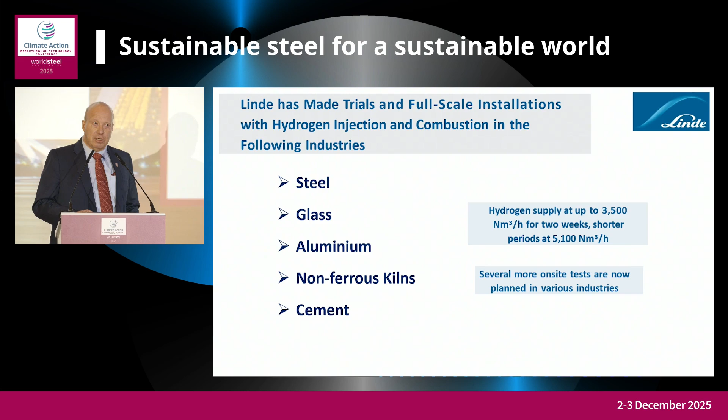It's quite tricky to carry out full-scale tests because you need to bring in the hydrogen there. We've been running up to about 5,000 cubic meters per hour. We've run for 2 weeks with 3,500 and so on. It is difficult, but the results have been great.

Traditionally, it's about reduction - it's about use of hydrogen in a short-term perspective, for example, injecting hydrogen into a blast furnace. And there are a lot of discussions, of course, about using hydrogen to a large extent in DRI production. Today it's about reforming natural gas, so it's not that big a step in a way there.

But what is worth noting is the scale required here when it comes to the hydrogen supply - the huge amounts. If you look at a DRI plant of typical scale, we might need a 1 gigawatt electrolyzer, and those are not off the shelf today, so keep that in mind.

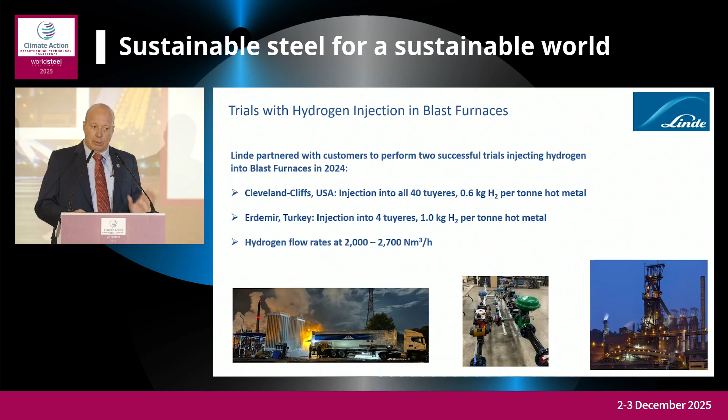However, it worked out fine. We've been involved with trials in blast furnaces. Here are 2 examples: what we've done with Cleveland Cliffs in Chicago and with Erdemir in Turkey. But that has been done on a level equivalent of 1 kilogram of hydrogen per ton hot metal, which is a fraction of what you maybe recall from the previous slide. Works fine, all good - so that was about that part of the reducing gas.

Now let's move into the use as a fuel. That is in the melting operations, that is in the heating operations. We start with reducing the need for energy.

That is the starting point. If we can do that by going from air-fuel combustion typically to oxy-fuel combustion, we can achieve fuel savings of, let's say, 30% or something like that. If we can do that in such a way, so we can also be ready to use hydrogen when there's a viable supply, that is the perfect pathway, I would say.

Oxy-fuel installations across the industries - we as a company have done about 900 of those, the majority in the steel industry. So this is no news for us.

What does it mean? Many people say, oh, this is strange, it will have a lot of implications on the processes. Well, the big step going from air-fuel to oxy-fuel has been taken at many occasions. And of course it has an impact on the furnace atmosphere, for example, where we go up to have the products of combustion that are practically only CO2 and water vapor.

However, what is interesting to note is that use of oxy-fuel combustion is very good for carbon capture, as we reduce the flue gas volume by say 75%, and we increase the CO2 concentration. So looking at the toolbox we have, it can also be combined in that way.

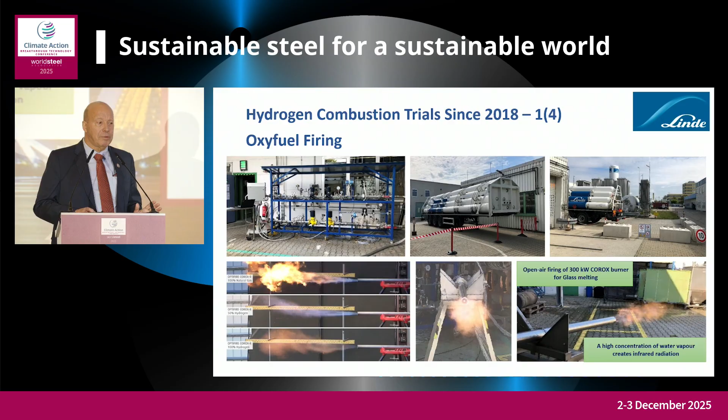Here you can see what happens when you blend hydrogen into the oxy-fuel, moving from 100% natural gas to 100% hydrogen, and see this in the various steps. Simply, this works perfectly fine.

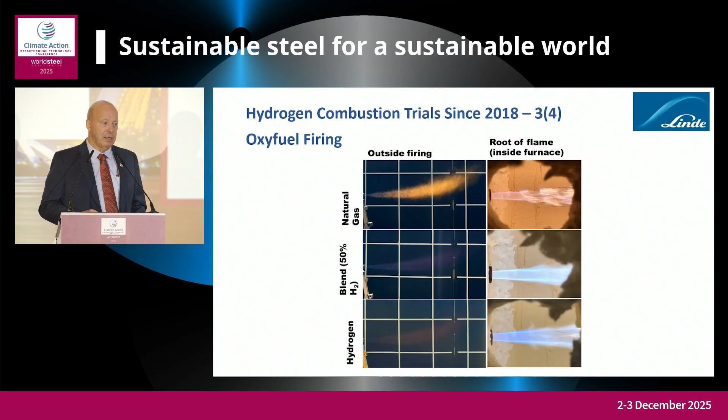So in simple terms, box is ticked. This works. And we can conclude that also from our experience using hydrogen and oxygen in the glass industry, for example. So we can blend in all the way up.

However, what is worth noting is that we should be very careful if we blend in with air-fuel combustion, normal air-fuel combustion, because then we could have a negative trade-off, creating a lot of NOx while saving CO2. That we don't want. So we have been working with this, and I can tell you the good story is that we are not increasing the NOx - we are decreasing NOx, we are decreasing CO2.

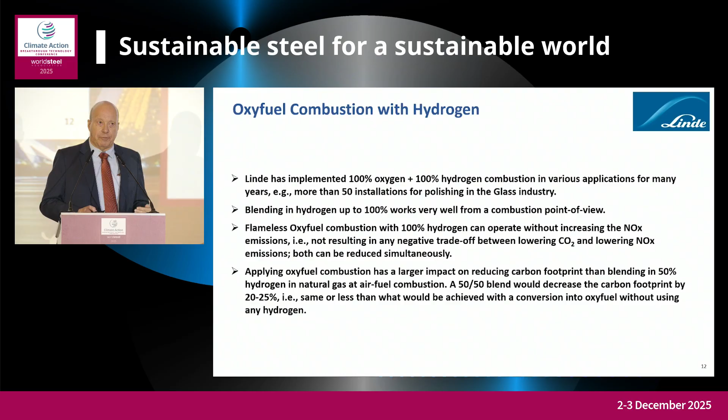It's also worth noting that when blending in, we talk about percent, and that is volume percent. If I blend in 50% hydrogen into the natural gas, I have a 50-50 mixture. The impact on the carbon footprint, providing the hydrogen is 100% zero carbon footprint, 100% green so to speak, is a little bit more than 20%. If I would do only a conversion from air-fuel to oxy-fuel, I would probably save 30%.

One of many technologies is the CoJet technology that we introduced in 1996, which became industry standard in electric arc furnaces. We tested this in full scale. It works perfectly well for the flame envelope of the oxygen injection jet. Not only are we saving on the fuel, but we are also getting a longer oxygen jet - it travels a longer distance, so it's a process improvement.

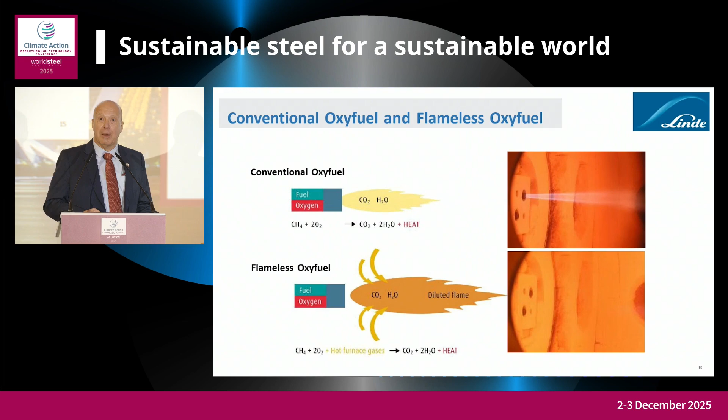That was examples of when we are cutting, when we are melting. When we go into heating, we talk about another type of oxy-fuel combustion - flameless combustion, not conventional. So we create a flame cloud instead of a very sharp flame. This is what we apply when we heat something - that could be a ladle, or it could be a piece of steel.

For ladles, we have tested this out full scale. We also have smaller installations up to 7 tons running with 100% hydrogen as a fuel using flameless combustion. So this works. It's more of a supply issue.

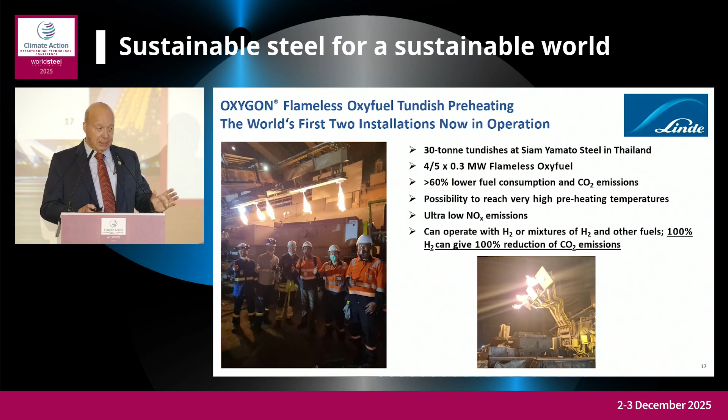Let me give an example from this part of the world where we see something new happening, and that is use of flameless oxy-fuel to heat tundishes. I'm very happy to reference that we see use of new technologies in the ASEAN countries here. This is from our great friends at Siam Yamato Steel in Thailand, where we have the world's first two systems with this. And this is then a possibility to use hydrogen going forward as well.

Now, reheat furnaces. We've been working for a number of decades with converting reheat furnaces into use of oxy-fuel combustion of various kinds. To date, we have done 190 installations across the world. In the past, this was mainly driven by getting more tons out per hour in existing furnaces. Lately, the focus has been on fuel savings. And this year, we've done 4 or 5 furnaces. We just started up 3 furnaces at Taigang TISCO in Taiyuan, and we see more and more of this coming.

So what will happen when we heat a material using hydrogen? Flame was okay, that worked. No increased NOx, actually a reduction. But what will happen if we start heating material, heating steel?

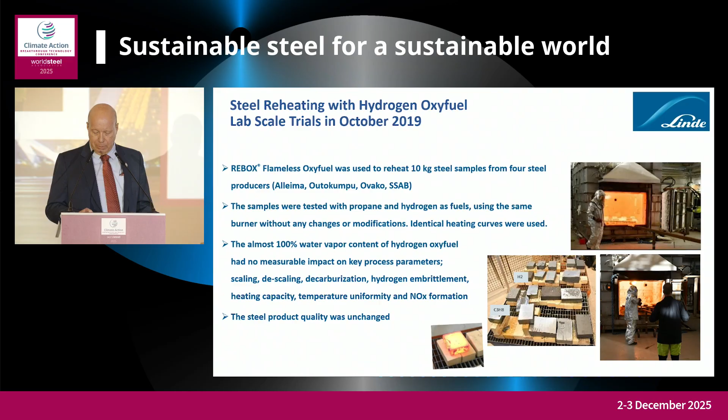It was then decided that after this world first, let's make it a real world first and make it in absolute full scale. So early last year, Ovako started operating this system, 100% hydrogen, 100% oxygen, across all the pit furnaces there.

The hydrogen comes from an alkaline electrolyzer, 20 megawatt. The electricity is 100% green - a blend of hydropower and wind power that is feeding it. The same goes for the oxygen that is supplied. So both the hydrogen and the oxygen is 100% zero carbon footprint.

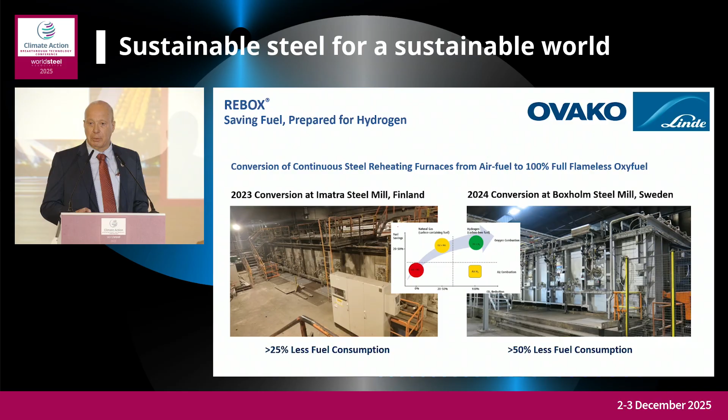We worked with Ovako for a number of projects over the years, and over the past 2 years we converted some of their continuous furnaces to 100% flameless oxy-fuel. Examples from Imatra in Finland and Boxholm in Sweden, and we made those furnaces hydrogen ready. There's not hydrogen available there today, but as soon as that is the case, we can start operating these furnaces also with hydrogen. And we already had very good fuel savings - first we fire less, then we fire clean. In the Boxholm case, we even reduced the fuel consumption by 50%.

If I would convert that into oxy-fuel combustion, I would reduce the power by 30% typically. And then I could, of course, play with putting in hydrogen with the air fuel. I could blend in hydrogen with the air fuel 50-50. I could do the same with the oxy-fuel and so on and so forth.

And then we can start thinking about what is the reduction in carbon footprint. I'm comparing the reduction in carbon footprint between air fuel and oxy-fuel, and also looking at what power we need for the hydrogen, how big an electrolyzer in that case, and how much we can reduce that. You can see that it's better to use oxy-fuel than blending 50% hydrogen with air fuel. And if we use oxy-fuel, we need substantially smaller power for supplying it. So we talk about 100 megawatts instead of 150, right?

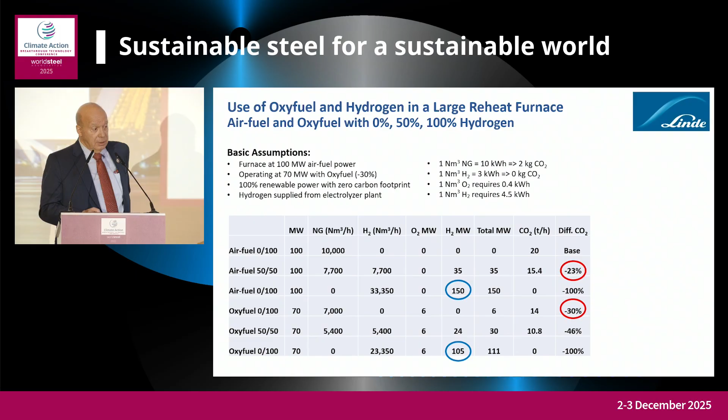How does this look like if you take now a step forward, 15 years from now? Some of you would react to the figures that I put here because they might be lower than what you expected, but I try to be realistic.

I think that for DRI, about 2.5 million tons of hydrogen will be used in 2040, looking at what is reasonable progress to come. There will be some use of hydrogen in blast furnaces, but there will also be use of hydrogen as a fuel, in those applications I've shown here in my presentation. If I look at this as a whole, 15 years from now, there might be around 4 million tons of hydrogen used in the steel industry globally. For sure the bigger part, 70%, will be used for reduction, but about 1/3 will be used as a fuel, which is not very much discussed.

What are the obstacles here? Well, one of the big obstacles is that everyone thinks hydrogen will become cheaper, and that stops it from becoming cheaper. I call it the catch H2. As long as people expect hydrogen to become cheaper and do not commit, we cannot scale up the hydrogen supply.

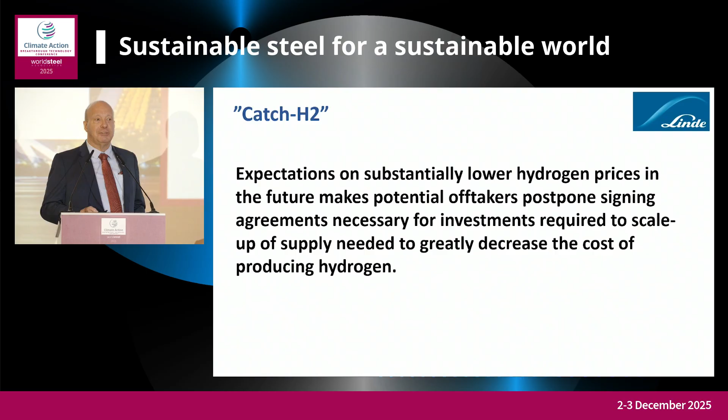Of course, there's also a determining factor, the price of electricity, talking about electrolyzers. In most places in the world, if you look at the total cost of hydrogen, somewhere 50 to 70% is the cost of electricity. However, we need to go up to a bigger scale than we have today, and to do that, we and other people are absolutely fine to do the investments, but we need to have the off-takers sign up for that. And if they just wait for hydrogen to magically become cheaper by itself, we won't get there. This is the catch H2.

Alternatively, we could supply the hydrogen based on natural gas, using an ATR or an SMR for that sake, but an ATR nowadays, together with carbon capture. We've been looking at that in many places. Just to throw a number here: if we would take natural gas from Norway, bring that to the Netherlands or Germany, and make hydrogen out of that, we will have a carbon footprint of between 1 and 2, probably closer to 1. If we would take grid electricity in the Netherlands, we will have a carbon footprint of 5. So the blue is greener than the green.

And the scale is there already. I have mentioned we have a project in Canada, with Dow Chemicals, where we are on the same scale as a 1 gigawatt electrolyzer, but we are making it from natural gas.

So, just to conclude, we can use hydrogen both as a reducing gas and as a fuel, but it's a big difference in scale of implementation. We need much smaller scale of electrolyzers, so it's much more accessible. We can save fuel today. We can implement the use of hydrogen much quicker if we do it as a fuel. That could be for cutting, melting, or reheating.

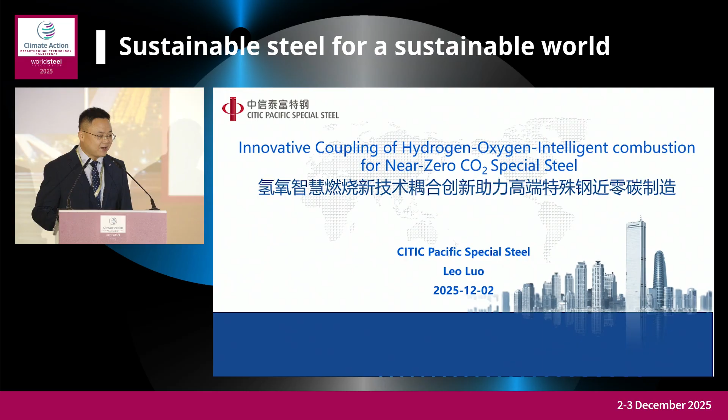Thank you. Good afternoon, everyone. This is Leo LUO from CITIC Pacific Special Steel. I'm now handling the technology work concerning climate protection. I'm really excited to be here at this conference and have the chance to tell all of you our technical solutions for greener special steel. What I'd like to share with you today is the innovative coupling of hydrogen, oxygen, intelligent combustion for nearly zero carbon dioxide special steel.

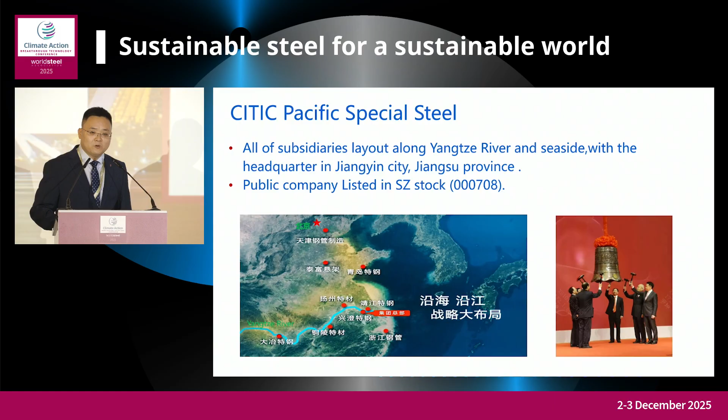Before diving into the main talk, let me make a quick comment about our company. CITIC Pacific Special Steel is a highly specialized special steel manufacturer in China with 9 subsidiaries. The headquarters of our company is based in Jiangyin City, Jiangsu Province, around 2 hours by car from Shanghai. All of our subsidiaries are laid out along the Yangtze River and the seaside. We're also a public company listed on the Shenzhen stock exchange.

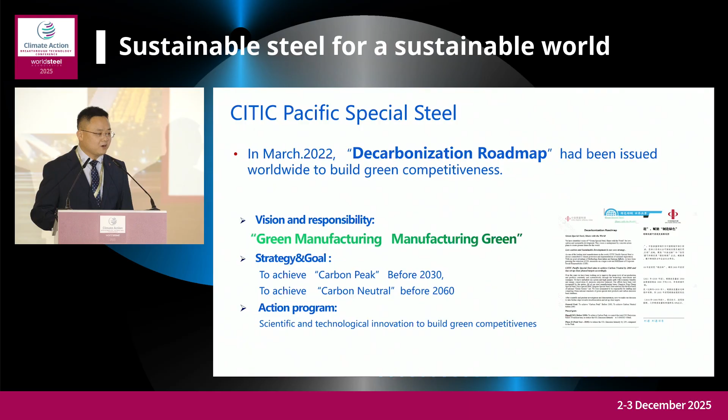As one of the leading steel manufacturers in the world, CITIC Pacific Special Steel is always committed to climate protection and implementation of our customers' expectations. Low carbon and sustainability is our core strategy. Early in 2022, we issued a decarbonization roadmap worldwide with a vision: green manufacturing, manufacturing green.

Green manufacturing, manufacturing green is not only a vision, but also an innovative action program that supports our climate protection. It contains 3 main points: green manufacturing technologies, green manufacturing products, and manufacturing green products. Generally speaking, we try to reduce carbon emissions in our own plants with leading-edge technologies, while helping our customers and users reduce their carbon emissions with our advanced products, and helping clean energies reduce their cost and upgrade their equipment. Finally, this supports manufacturing green.

In July last year, at the World Steel Association Conference, we initiated scientific and sustainable decarbonization through cooperative innovation, to push carbon emissions reduction and economic benefits to go hand in hand. So now, let's return to the topic of the report, 4 chapters for you.

The first is the project's background. It's undoubted that climate change is the biggest threat modern humans have ever faced. Low carbon and sustainable development is definitely the way forward in the future. According to analysis from Columbia Business School, steel sector's Scope 1 and 2 emissions account for around 10% of global emissions. Furthermore, as a basic material, steel supports the development of advanced equipment for low carbon transition. So all in all, the steel industry is super important in the global low carbon transition, where steel players must take heavy responsibility for climate protection.

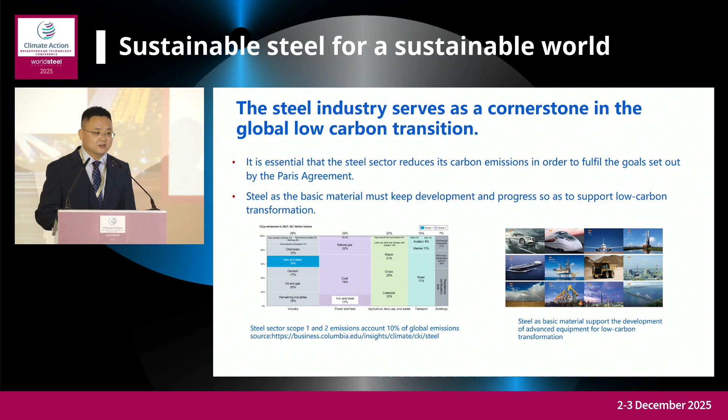Ever since the 20th century, the modern steel industry has come a long way. It made huge leaps in quality, cost, and efficiency, turning steel into a go-to material. The technologies based on carbon-oxygen reactions made a big contribution. But starting in the 1980s, people started waking up to climate change and took it more seriously. So the carbon-oxygen reactions became a big problem too, as you're aware, being the main cause of high carbon emissions.

So it's essential to improve the traditional metallurgical theory and technology, aiming for low carbon. Replacing carbon with hydrogen is the key for the steel industry to achieve nearly zero carbon manufacturing. Clean energy and hydrogen technologies are the key supports.

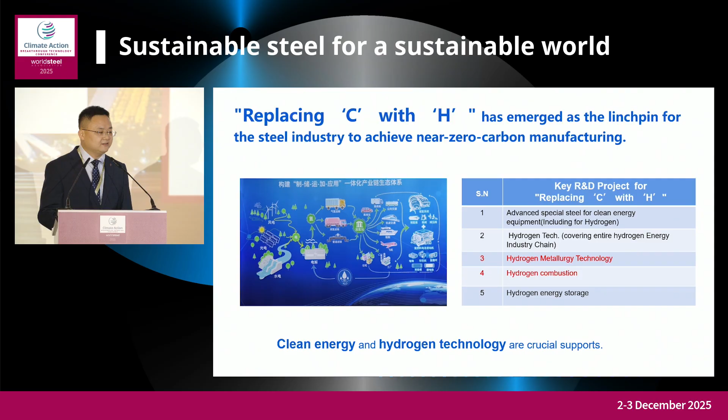So we examine the whole green hydrogen chain from production, storage, transport to end use, and finally identified a key R&D project list focused on hydrogen metallurgy technologies, hydrogen combustion, as well as special steel for the clean energy and hydrogen industry.

Right now, hydrogen metallurgy still faces theory and cost challenges, as you know, so it's not ready for large scale use.

But combustion is the center of steel manufacturing. Efficiency and high quality heating is crucial for performance, quality, energy conservation, and environmental sustainability for special steel. So we focus on hydrogen combustion technology to cut down carbon emissions while boosting economic benefits, decarbonization benefits, and product qualities all at the same time.

Now, let me introduce our answer: combustion coupling innovation.

Replacing fossil fuels with hydrogen can achieve zero carbon combustion, but we think zero carbon combustion doesn't mean zero carbon production. It's necessary to meet the requirements of safety, efficiency, and low consumption at the same time.

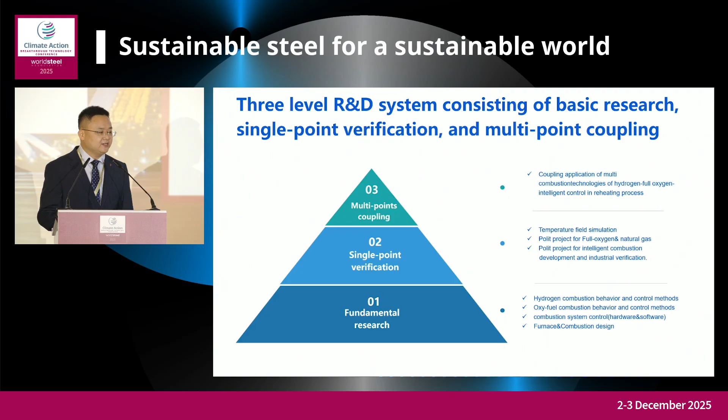And it's necessary to ensure there are no adverse effects on the process and quality of the special steel. So therefore, while conducting research on individual technologies such as hydrogen combustion behavior and control methods, industry verification and multiple technology coupling should be carried out. For this purpose, a three-level R&D system has been established, covering basic research, single-point verification, and multi-point coupling.

Hydrogen, as you know well, has a high energy density and low consumption, and there's no carbon emissions. So hydrogen is the core, we think it's the cornerstone of zero carbon production.

But hydrogen is flammable, explosible, and prone to leakage. It has characteristics like faster burning speed, high temperature, and flamelessness, and hydrogen embrittlement brings huge risk for use. So first of all, we did a thorough research on the combustion behavior of hydrogen and tried to develop special burners to make sure the combustion is safe, controllable, and reliable.

Oxygen-fuel combustion, as you know well, can improve burning efficiency, reduce fuel consumption, and also cut the emissions of pollutants like nitrogen oxide. We think it's a multiplier for efficiency and environmental protection.

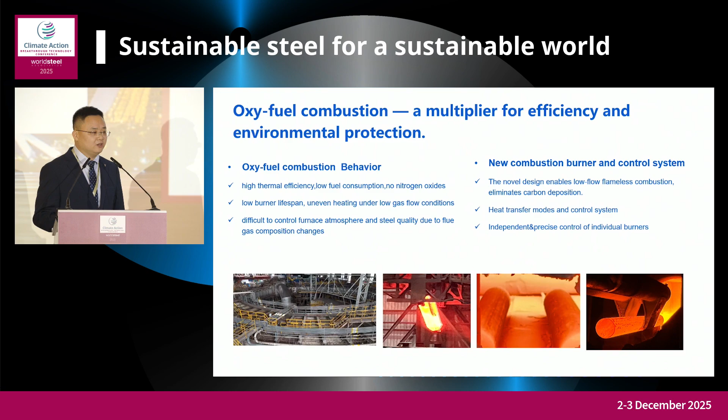But under low gas flow conditions, there may be some challenges like low burner life, uneven heating, and difficulty controlling the atmosphere. So we focus on updating the burner design and developing a new control system to master this good technology.

Intelligence. If oxy-fuel combustion and hydrogen combustion represent the body and heart, we think intelligent combustion should be the brain and nervous system to breathe life into them. Software and hardware work together to make up this full intelligence combustion system, turning it into a kind of living whole that can sense itself, make decisions, get better over time, and even evolve.

Through systematic integration and intelligent regulation, the three combustion technologies are deeply coupled to achieve a qualitative transformation from complementary to synergy.

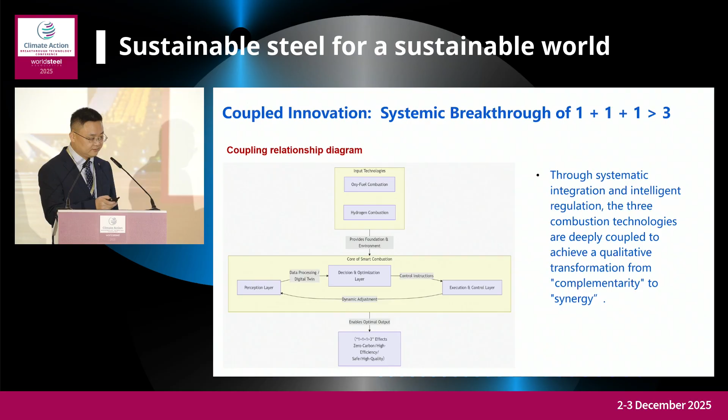So third, the project results. The project has completed an engineering study and verification for oxy-fuel combustion, intelligent combustion.

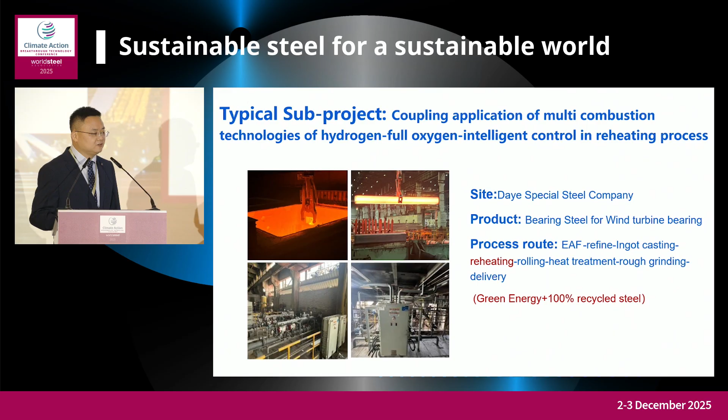Daye Special Steel, one of our subsidiaries in Hubei province, completed the project: coupling application of multi-combustion technologies for bearing steel, a very key product in the steel industry, based on EAF plus 100% green energy and 100% recycled steel.

For the net zero emission model with green hydrogen, the process carbon emissions can reduce to zero, and the PCF can reduce around 50%, but the costs have a big increase, around 45%.

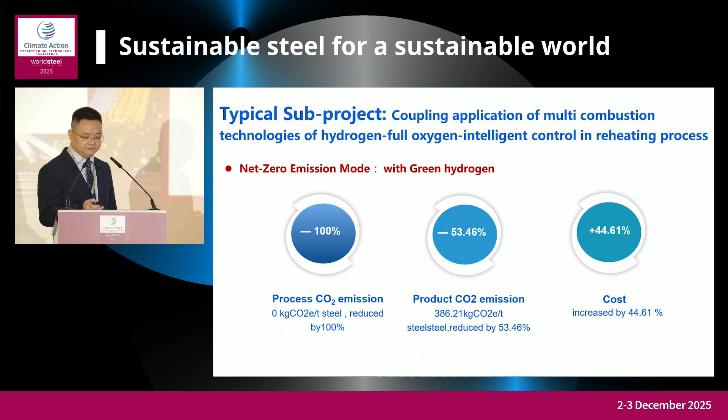Combustion quality performances: the heating rates increase around 22%, and the temperature uniformity has good performance. The amount of iron oxide scale reduced around 31%.

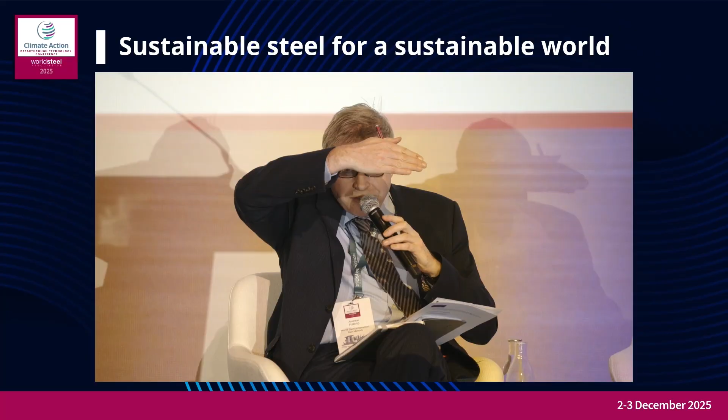I have a question. I think, in general, it's great to see this—we're moving from what we're going to do, to examples of where we as an industry have delivered and done stuff. What advice would you give to another organization looking at using hydrogen within their process, from your learnings? Is there any advice you would give another company looking to use hydrogen? What was your main learning from using hydrogen?

Okay, yes. As you can see, we set up two modes. One is using industrial hydrogen by-product, just for economical consideration. And we also use pure hydrogen, just for technology verification. As one of the people mentioned, it's currently difficult to fulfill the price, the cost, for green energy. So maybe in the future, when the price and cost are available, we can use it. Currently we are running the projects with production by-product hydrogen.

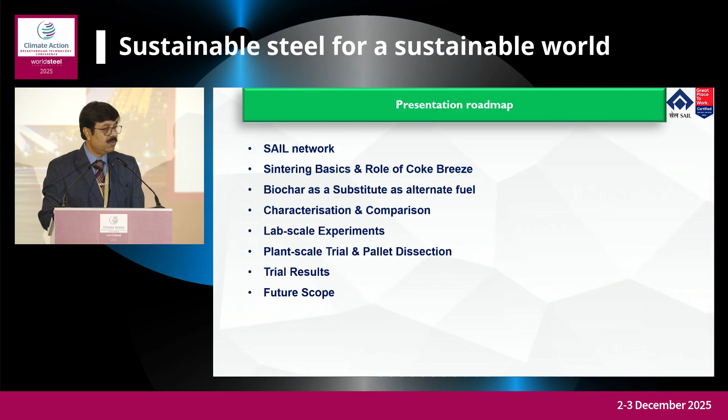And then plant scale trial and pallet dissection, then the results we have got after usage of biochar by partial replacement of coke breeze, how the sintering process progressed, what results and quality of sinter we have got after this replacement, and then the trial result and future scope.

Now going forward, the SAIL network—we have 5 integrated steel plants all over India under SAIL, and our Durgapur Steel Plant is located in the eastern part of the country, and our R&D center is also in the eastern part of the country, 300 kilometers away from Durgapur Steel Plant.

Now this is sintering basics and coke breeze. The sinter, what is sinter? The iron ore fines, which is basically most of the fines generated by the mining of lump ore, cannot be rejected. So we used to use those fines to charge into the blast furnace, but as fines they cannot be used directly in the blast furnace. So we used to agglomerate it to form a lump and charge it in the blast furnace.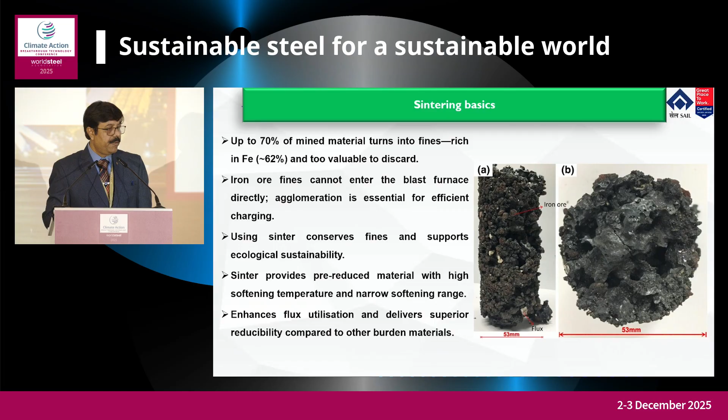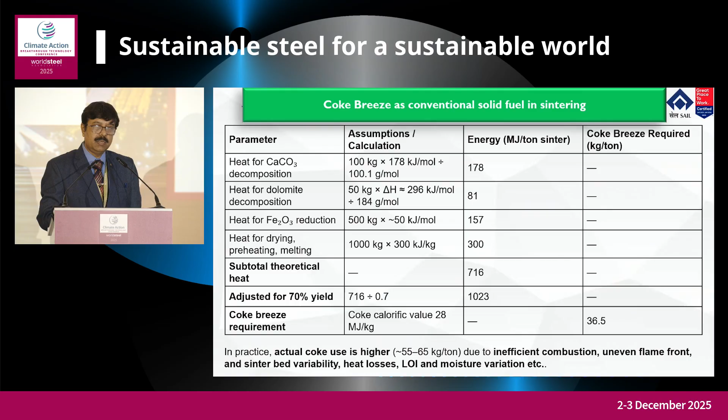Coke breeze is the conventional solid fuel, and this is the heat value we calculated, including the heat value of calcium carbonate, as coke breeze is utilized for heating of the iron ore fines mixed with flux. Flux, to maintain basicity in the blast furnace, means we use crushed lime of -3mm size and dolomite mixed into the iron ore fines to form raw mix. The heating value of coke breeze is utilized for heating iron ore fines in pure form, as well as heating fine material like lime. These are the heat values imparted: heat of calcium carbonate, heat of dolomite, and then heat used for reduction of different forms of iron oxide.

Now, biochar as a substitute, as an alternate fuel. This biochar is considered a carbon-neutral resource. Basically the biochar we considered in our experiment is bamboo biochar.

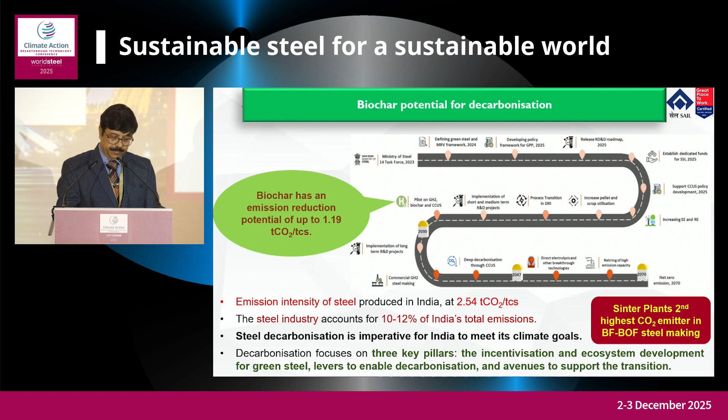Now this characterization and comparison, what we have done in the analysis part, this is the proximate analysis of biochar versus coke breeze. We have shown that in the first column it is coke breeze, and the proximate analysis data is like that. If you come down to the last row, the gross calorific value, coke breeze is having 6,000, and as against bamboo biochar, what we have chosen for the alternate use, that is 5,900 or say 6,000. So it is almost equivalent to the coke breeze.

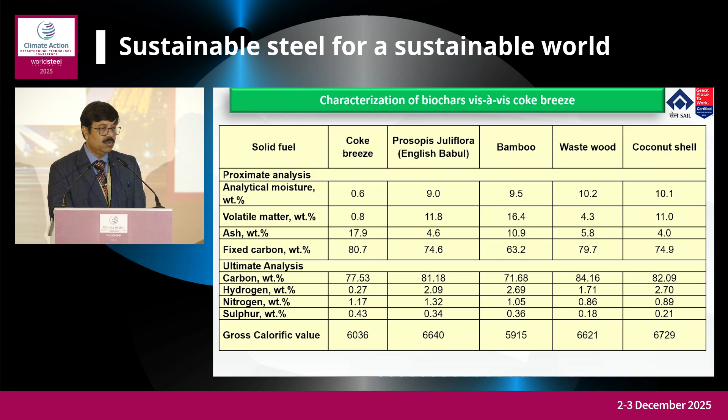Now the characterization of biochar versus coke breeze in sintering, that is the combustion rate. Coke breeze is very slow and steady. Biochar, because its flame point is much less than coke, burns short. These are the comparisons we have predicted and analyzed and got the result.

Now the lab scale experiment what we have done in our R&D, Mr. Dhara, if you can come down. Good afternoon.

So first of all, Majumder sir has shown that in lab scale we have tried all 4 biochars available commercially in India, and out of those only the bamboo results are being shown. However, we have data for all the other types, and the Government of India has published a good document of what biochars are available and can be tried. But we have concentrated here on bamboo itself because of its sustainable benefit in Indian tropical conditions.

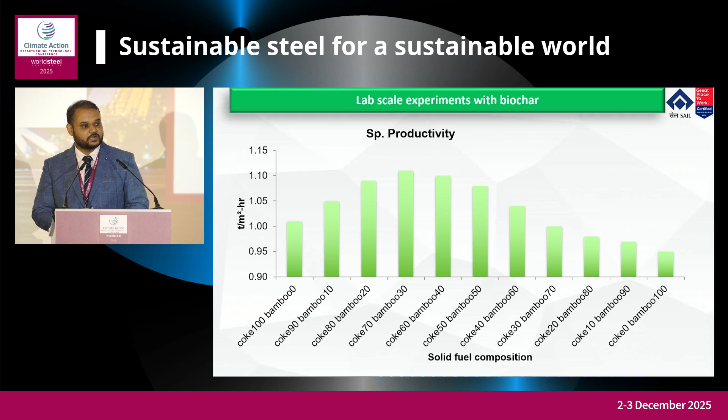First of all, we have tried from 0% to 100% utilization ratio with replacement at 10% intervals. As we can see, the productivity peaks at around 30 to 40% replacement level, beyond which productivity gets reduced because of strength deterioration and breakage tendencies.

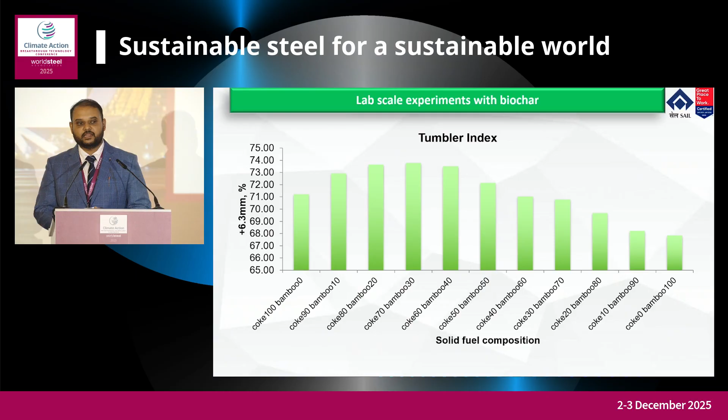Next, coming to the tumbler index, which is a measurement of strength in sinter for actual blast furnace condition - the higher, the better. The plateau comes at around 20 to 40% range, beyond which it deteriorates to a very large extent and is not recommended with a conventional process. However, there are other processes currently under development so that we can utilize more biochar.

Next is the granulometry stage. This comes directly from the mean size figure. Our requirement is typically 5 to 40 millimeters for the blast furnace, and we have done a good comparison of coke versus biochar, because ultimately we are mandated to replace coke breeze, not fully, but up to a certain percentage. Again, our standard ratio at lab scale was around 20 to 30%.

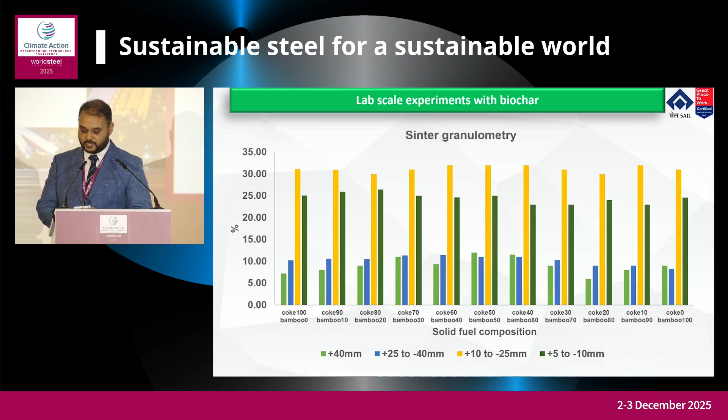With these data, we have moved to our plant to validate this lab scale data into an industrial scale and to see what benefits we can achieve.

But again, the conditions from the production and productivity angle are also considered. So all this data, we have tried for an optimization of having a lower value of productivity impact, however having much benefit in emission potential. So our main study was an industrial optimization.

Now the plant scale trial - we have conducted a plant scale trial in Durgapur Steel Plant in a full-fledged trial, and before going for an industrial scale, we tested some physical analysis of these properties like flowability, bulk density, and other properties.

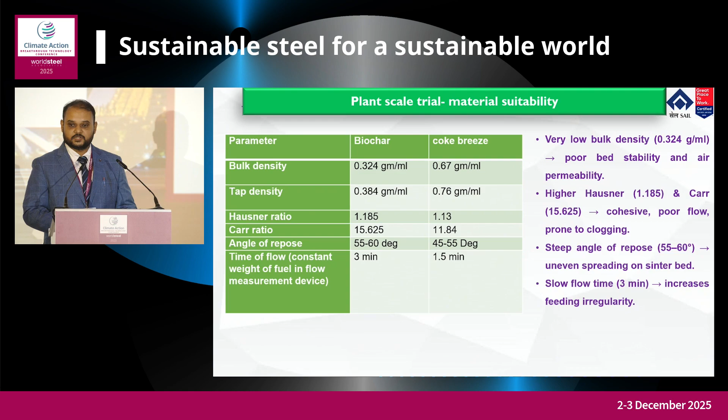This was for handling of these biochars, because the Hausner ratio and Carr ratio and flowability tests are all standards, since our systems were designed for handling coke breeze, and biochar has some properties different from that of coke breeze. So we had to suitably modify our charging devices, our weigh feeders, and our measurement devices to suit the percentage replacement of biochar.

These are how we have charged the coke breeze, and this is the bamboo biochar we have sourced. The main visual difference is that biochar has a finer as well as bigger particle mixture, is slightly moist, and tends to be a bit sticky in nature. We have taken care of these considerations in our charging devices, and this trial has been continuously done from February to June this year.

These are industrial trial results. We can show that the tumbler index and Sinter granulometry have both benefited from these biochar additions because of its higher temperature generation and low flame front generation. The tumbler index, AI and AM - AM is the arithmetic mean size, which is required for good blast furnace operation and reducing instability. AI is a measurement of Sinter superfines generation, which is also an emission criteria. We had to maintain a lower AI for a better environment.

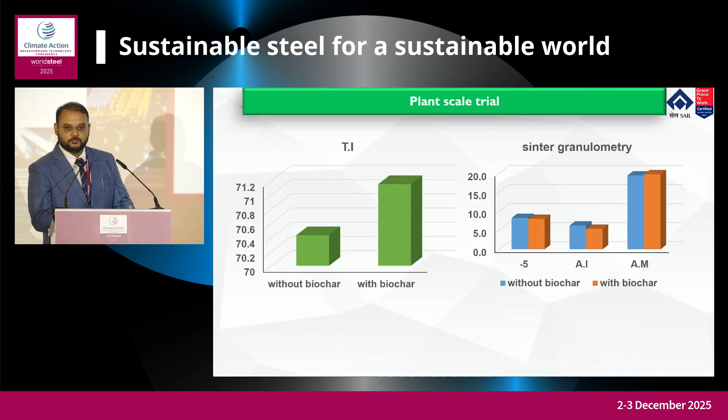This is a unique study we have conducted. We lifted a fully ready pallet with biochar as well as without biochar, and compared these two pallets side-by-side with size analysis. We segregated this into 9 compartments, both horizontally as well as across the width of the machine, and compared the granulometry - the percentage of 40 to minus 5mm - from each layer with biochar and without biochar.

From the value, we can see that the top layer, which is weaker because of thermal shock and heat insufficiency, has been partially solved with the biochar additions. These figures have ultimately been effective in having a good blast furnace grade sinter generation at Durgapur Steel Plant.

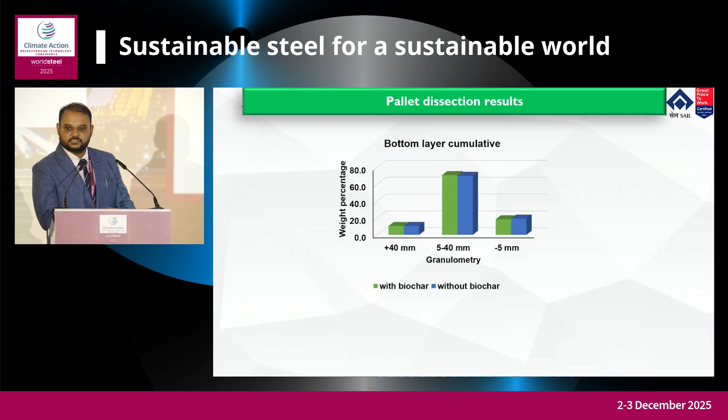Now, through this industrial trial, we could reduce 2 to 2.5 kg per TCS of CO2, which is of coke breeze, which ultimately corresponds to a figure of 8.5 kg CO2 and 0.01 TCO2 per TCS in industrial scale. Improvement in productivity as well as sinter quality has been achieved in plant scale. This is a very encouraging trend, and not limiting ourselves to it, we are planning to go much further in both lab scale as well as on an industrial continuous basis.

This is one snapshot of the resultant discussions in terms of calorific value, reducibility, strength, and from the angle of practical applications such as storage and handling, which we have felt and solved because of our designing aspects. We have jotted it down. We are not limiting to this - we have planned to move further with lab scale and plant scale trials, which will be concluded here.

Thank you, Mr. Dhara, for explaining the technical part of what you have researched in your laboratory, followed by its application in the plant scale trial.

Hello, technically it is convincing that we can use biochar as a replacement for coke breeze. How about the concern of deforestation? If we use bamboo for making biochar, then there is a concern of deforestation also. How can we address that?

In India, bamboo has been declared a grass plant - a species of grass. So this grass species doesn't come under forest policy. There is no problem in cutting bamboo, which is prohibited under forest policy for deforestation. For that purpose, the Indian government has declared bamboo as a grass species of plant. So there will be no legal issues with cutting bamboo that could go against deforestation rules.

Can you tell us more about the industrial production of biochar? How do you realize this biochar production on an industrial basis, regarding the technological process for bamboo biochar production? Which pyrolysis process do you use, how do you realize this, and how big will the plant be? Which technology do you use?

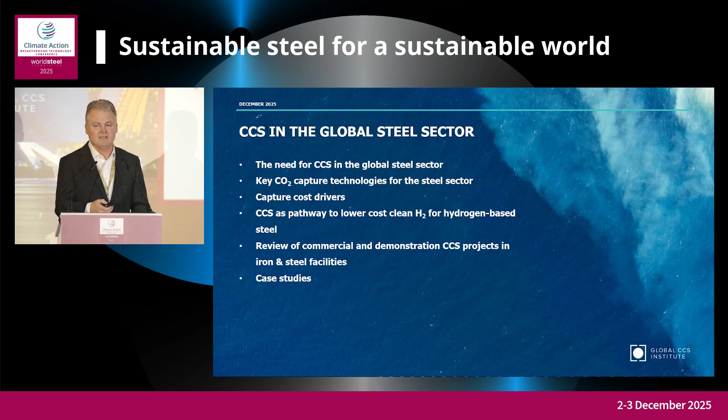At a glance, what is CCS? Carbon capture and storage involves 3 key steps, the first being CO2 capture. Capture is a gas separation process where we take CO2 that is dilute and often at low pressure, and we actually separate that CO2 into a high purity form. The reason we do this is that subsequently we're planning to store it geologically, and we need to have it at high concentration to make sure we make the most of those subsurface volumes that we have.

The second part is transport, where we move it to its ultimate destination. There's 2 primary means. One is pipelines, where it's sent by high pressure, so we pressurize the CO2 and pipe it. The other is we can chill it down to low temperatures and liquefy it. That happens at low to moderate pressures, and that's suitable for global shipping. There's already a substantial amount of infrastructure globally for both modes, and we're seeing a lot more CO2 shipping emerging at the moment.

Finally is storage. We won't talk about storage so much today, but ultimately it's putting it into the ground, into porous formations under the ground, very similar to those that hold natural gas and oil naturally. So today's focus is going to be primarily on capturing CO2 because that's the part that is directly impacting steelmaking. But you do need to realise, of course, there's going to be transport and storage downstream.

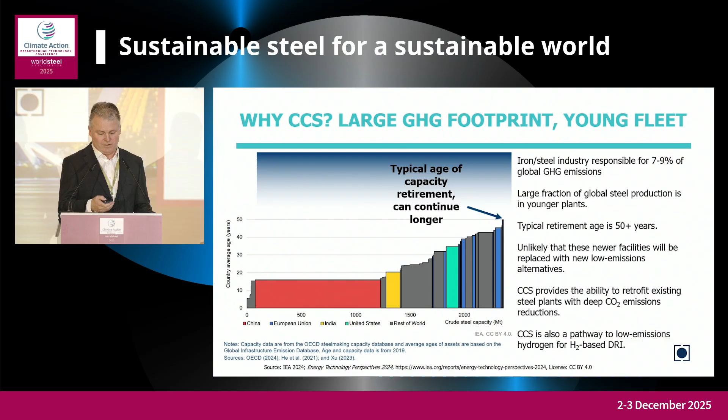Having a look at some of the different types of CO2 capture technology, they're all doing the same thing: separating CO2 from a mixture of gases at low purity and then producing it at high purity.

The predominant form of CO2 capture technology today is based on solvents. Solvents are liquids which interact with a mixture of gases and preferentially absorb CO2 from the gas. We can then separate and remove that CO2 from the solvent later on.

The typical solvents we use, the most common ones, are based on what are called amines, a class of chemicals. The way we get the CO2 back out of the solvent is that we typically use heat. We heat the solvent back up, and then it releases the CO2 in a high purity form. That's how we achieve our separation.

I mentioned amines are the most common. We also have hot potassium carbonate as another variant. There's an incredible amount of technology development underway by companies around the world to find new and improved versions of these solvents. Amines work really well and have been around for a long time, but they do have some downsides. They're fairly energy intensive to regenerate, to get that CO2 back out, that heat step. So we're always looking for better ways to do that.

We also have what are called physical solvents, which don't involve a chemical reaction. They simply absorb CO2 the way you'd have CO2 absorbed, say, in a fizzy drink. They tend to be better for higher pressure applications, not so relevant for steelmaking, but I just mentioned those for completeness.

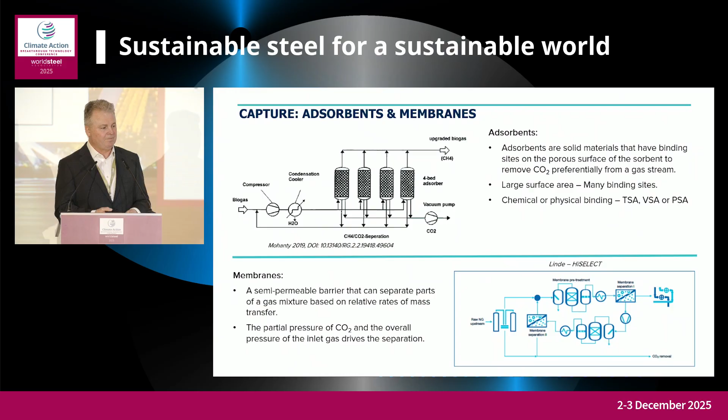Another category that's getting more attention these days is cryogenic CO2 capture. This essentially involves condensing CO2 out of a gas stream by making it very cold. Typically, as you cool the gas down, CO2 will condense early, once you've removed the water. Once you get down to around minus 30 or minus 40 degrees, the CO2 will condense and you can separate it as a liquid.

These processes work, they're certainly effective. They're not quite so relevant for steelmaking, except if you're involved in certain supplying industries. Just to round out the picture, these are probably a little less relevant for steelmaking.

We also have what are known as oxy-combustion capture. This is where rather than combusting a fuel in air, we combust it in purified oxygen. We produce high-purity CO2 directly from the combustion. We don't have a mix of gases, so we make sure the nitrogen that would normally be polluting or contaminating your flue gas is not present.

There's also chemical looping, which uses a chemical intermediate and effectively means you're keeping the fuel and the combustion reactions separated. We don't see too many of those, but they are gaining a place.

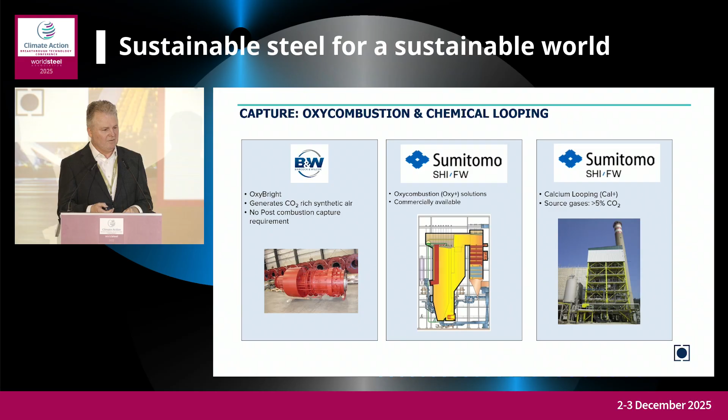So stepping out of there, what are we looking at in terms of technology? When selecting a CO2 technology for a particular application, CO2 concentration really matters. In the case of steelmaking, your concentrations tend to be set by the process itself, but those looking to develop new and improved forms of iron and steelmaking, anything you can do to produce a higher purity CO2 stream will be very effective at bringing down the cost of capture downstream. Scale matters too; higher scale tends to be cheaper than lower scale.

Then we've got factors like the pressure of the stream. Low pressure streams tend to be common in steelmaking. Cooling requirements matter too, since most CO2 capture processes require cooling. How much capture you're doing matters, whether you want to capture 90, 95, 98, or 99% of the CO2. The last one, particularly relevant for steelmaking, is impurities—stream impurities including particulates, other chemicals and so on. These can have a very direct bearing on the technology you might choose. Some technologies are more tolerant of impurities than others.

I'll very briefly touch on hydrogen, but we've had some very good presentations on that already. I simply wanted to make the point that one of the ways CCS can help steelmaking is in helping to produce reasonably priced hydrogen for use in your processes.

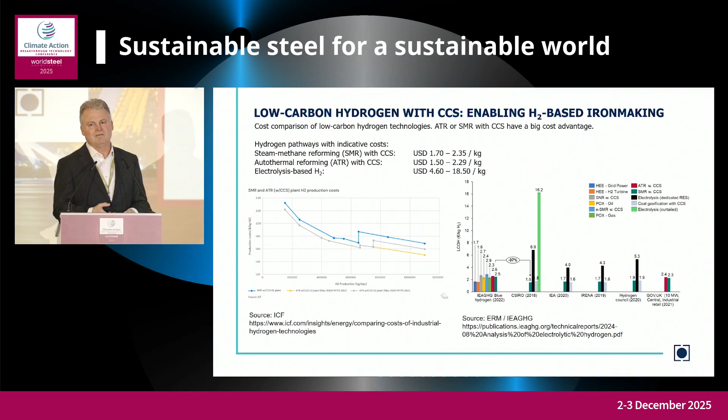Cost matters. We don't have the luxury of time to wait for electrolysis-based hydrogen to come down the cost curve. So this lets you get started with your hydrogen-based steelmaking today. If and when electrolysis-based hydrogen can step in later on, it's simply a matter of swapping out your source of hydrogen.

We've also got the Baotou Steel project in China, which is very close to operation from what I've been able to obtain in the media. Both of those are solvent-based capture processes, using solvents to capture CO2 from steel plants. The ADNOC facility is a DRI unit, while Baotou Steel is a blast furnace unit. That actually makes the Baotou Steel unit particularly important because of its scale—it's going to be the largest blast furnace unit with CCS in the world.

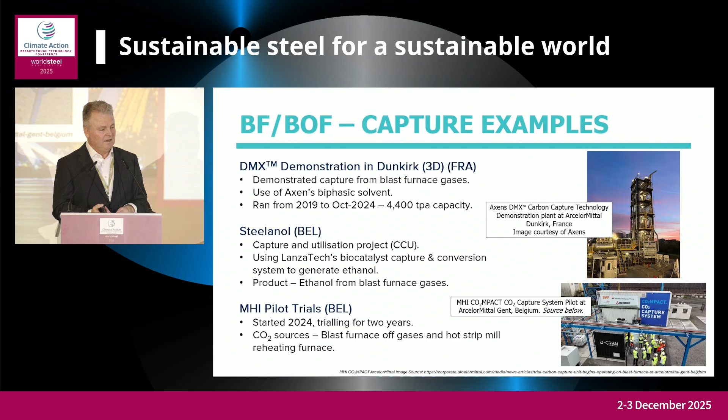Steelanol in Belgium is a carbon capture and utilisation project. Up until now I've been talking about carbon capture and storage; utilisation is where you take the CO2 captured and use it for some economic purpose. That's using LanzaTech's process, which was mentioned earlier today, and also MHI, Mitsubishi Heavy Industry, a key company in carbon capture around the world. They've got a project in Belgium trialling for 2 years, underway at the moment, looking at blast furnace off gases and hot strip mill reheating furnace gases, in Ghent, Belgium.

Some examples from DRI: I've mentioned the Abu Dhabi example, the Abu Dhabi Carbon Capture Company, operating off gas coming off the Emirates Steel facility. That's a DRI unit, 800,000 tonnes per annum capacity, producing 98% pure CO2, decent purity. It's been operating since 2016, and for quite a long time has really been the primary example of CCS in steelmaking.

There's also the example of CCU, carbon capture and utilisation, at the Ternium Puebla facility in Mexico. It doesn't get as much profile because it's for utilisation purposes, but it's actually quite large, capturing 1.7 million tonnes per annum of CO2, and it's been running for longer as well, so it's a good example of one of those plants. It captures CO2 for the merchant market, used for things like food production, greenhouses and that sort of application.

I'm Yasumitsu Shimura from JFE Steel Corporation in Japan, and today I will talk about this topic. The outline of today's presentation is shown here. First, I'll explain the background of this study.

This slide shows JFE Steel's transition strategy to a low carbon process. We consider the period up to 2030 to be a transition period, and we promote the transition to low carbon steel process. The period from 2030 to 2050 is defined as the innovation period. We aim to achieve carbon neutrality by establishing and implementing innovation technologies. We aim to reduce carbon dioxide emissions by 30% or more in 2030.

And next, in 2050, we aim for carbon neutrality. The following technologies will be developed to achieve these challenging goals, such as use of the conventional blast furnace method combined with a carbon neutral process, expanding the use of electric furnace, and increasing the amount of scrap used. Today I will explain about this direct reduction process.

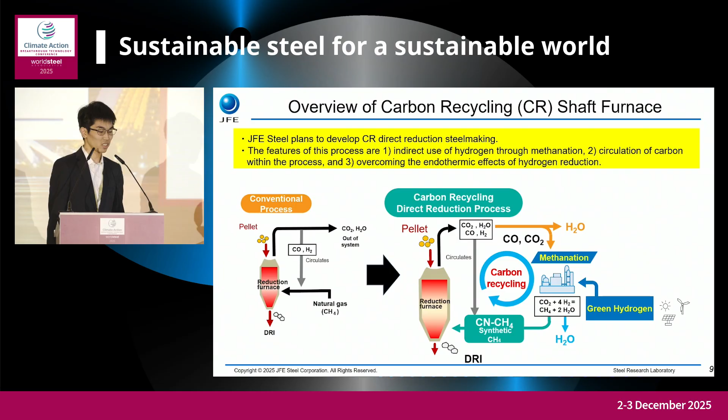As you know, reduction with hydrogen is a highly endothermic reaction. But in this process, carbon is not discharged out of the system. Carbon continues to remain in the reduction gas as carbon monoxide. There is no need to increase the hydrogen ratio in the reducing gas.

The aim of carbon recycling is, first, to achieve carbon neutrality by repeatedly reusing carbon. Since reduction by carbon monoxide is an exothermic reaction, it is considered possible to avoid the endothermic effects of hydrogen reduction, such as decrease in reaction rate or degradation of iron pellets. This is explained on the next slide.

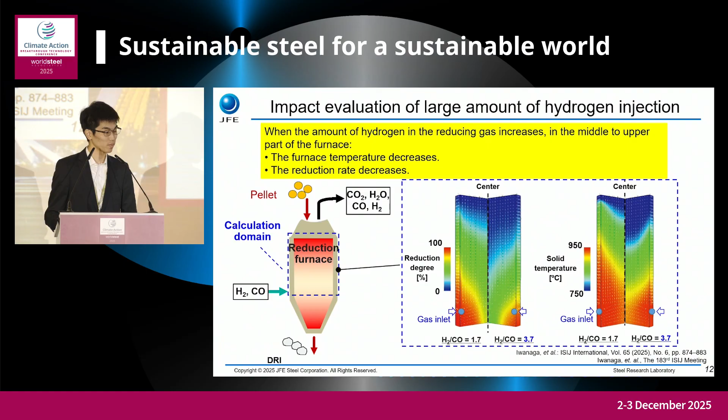This slide describes the various subjects of endothermic reactions. As I have said many times before, reduction by hydrogen involves a large endotherm, and the reaction rate will decrease. There is a concern that the lowering of the reaction rate will cause a decrease in productivity of the shaft furnace. Also, as I mentioned before, there is a concern that the decrease in temperature from the endotherm may promote the reduction degradation of iron ore pellets.

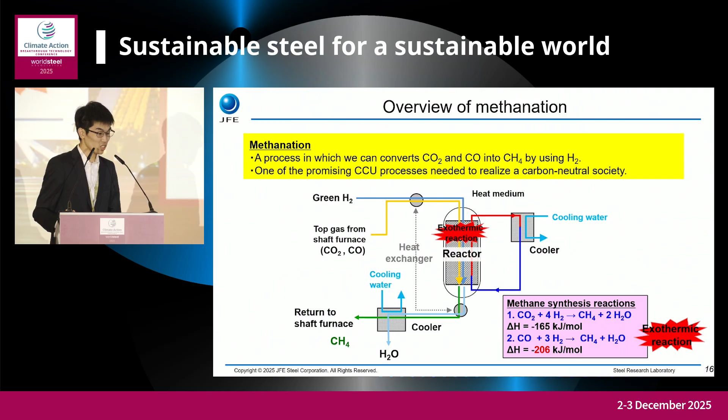After the production of methane, the moisture in the gas is removed by cooling. This slide introduces concerns regarding methanation using carbon dioxide and carbon monoxide mixed gas.

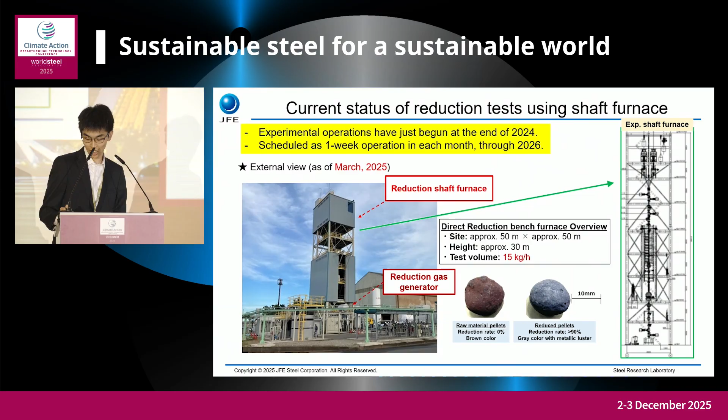In order to establish a carbon recycle shaft furnace process, we plan to investigate the effect of gas composition and hydrogen/water addition amount on methanation reaction efficiency.

We have been conducting reduction tests since the end of 2024 using a small shaft furnace built within our own factory. That's all. Thank you.

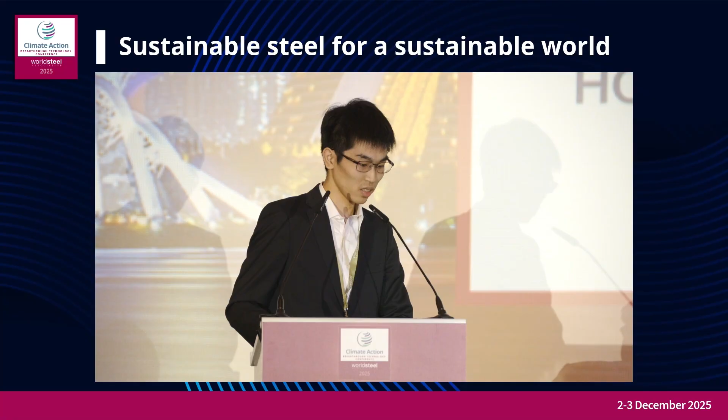This is a difficult question to answer. Maybe you could take it up at the coffee break in that case. Okay, thank you for your presentation. Thank you.

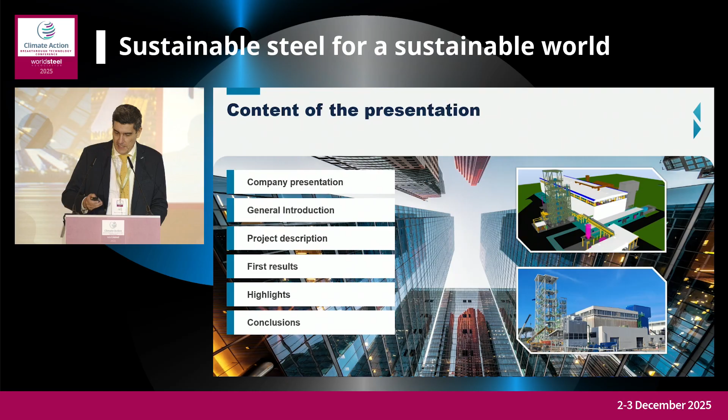I will give you a very quick overview of the company and the general context in which we are moving, but we know it very well, and then I will go through the process and what I call the highlights, which are, in our opinion, the main issues which should be studied with such a large experimental platform. RINA Group is a large international group with a presence all over the world, and it has a long history.

The history of RINA started with the unification of Italy and is continuing right now. 12 years ago, RINA acquired a company, my company, that is now named RINA Consulting Centro Sviluppo Materiali, which means RINA Consulting Materials Research Center. We were the research center of the public Italian steelmaking industry. Then we became private, and now we are more or less 250 employees, most of them researchers. Our headquarters is in Rome.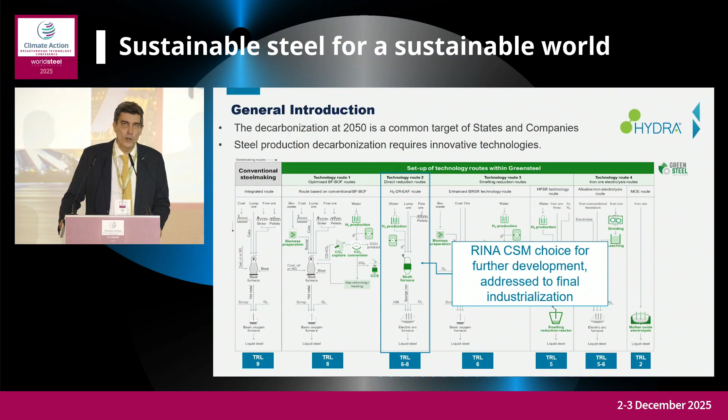But ready for the transition to hydrogen, though with several aspects which need to be further studied as an R&D center for full hydrogen implementation. For sure, there are other technologies, all interesting from my point of view, but this was the selection, the choice that we made.

As I said, the process is for process development, so we are not focused on the development of the plant itself. We made our selection from what we consider the state of the art.

The provider of the plant is Tenova, and the DRP plant is based on the Energiron technology. I'll give you more insight in a few slides. So Tenova is the provider we selected. Danieli is in charge of the erection of the pilot facilities, and Sapio is the gas company.

What we did first, before starting the project, was discuss with steelmakers, and in parallel with the analysis of the technologies, we recognized that a single pilot plant was not enough to support this type of transition. It was necessary to have a complete platform, facing all the issues of hydrogen utilization, from material and component qualification and testing, up to utilization for the direct reduction process and further melting step.

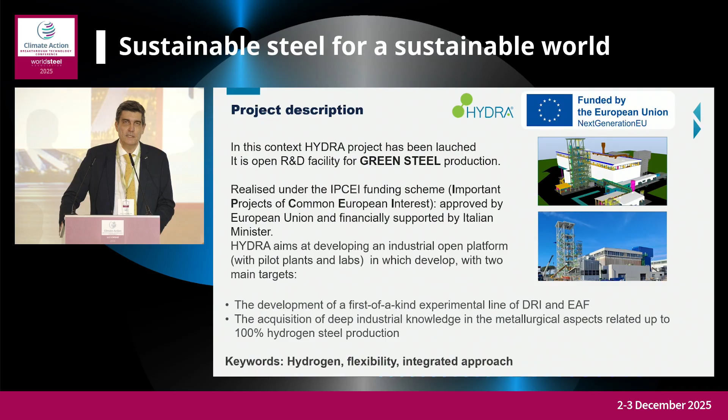We selected the electrical furnace, but I'll give you more insight in a few slides. We also considered the downstream processes - we had some very interesting presentations before mine. Downstream is also a very natural gas consuming step, so it deserves important attention.

So our project is divided into four streams of activity, addressed as work packages: one for the labs, one for the erection of a direct reduction plant, another for the electrical furnace, and finally the one devoted to the study of combustion issues.

The first work package is devoted to the realization of labs for the qualification of materials and components. We already have those types of facilities in my company, but we decided to strongly improve this testing capability for several reasons, which I've listed here - some of the main ones.

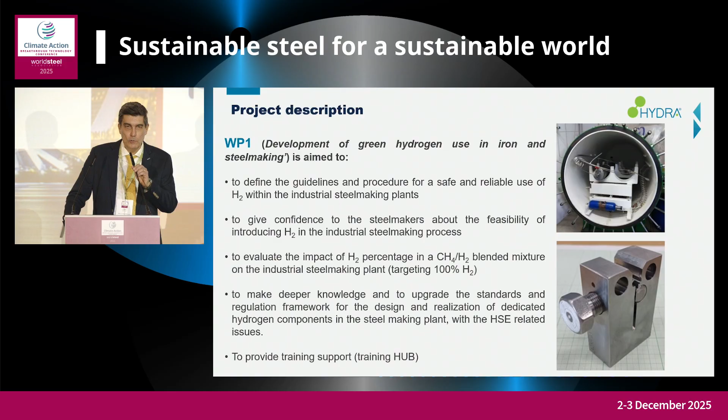The goals are to define guidelines and procedures for the use of materials, to give steelmakers confidence about performance and utilization of materials and components, to evaluate the impact of hydrogen-containing atmospheres - pure hydrogen and also blends of hydrogen and natural gas - on material performance, and also to support deeper knowledge and upgrade existing standards. You know there is a lack of standard regulation related to hydrogen utilization at the industrial level.

At this moment, the plant will be fed by 4 wagon tanks - not only to ensure enough time for testing, but also to perform gas blending, which is very important for this type of activity. The plant is also equipped with gas and water treatment lines, and a CO2 capture unit.

The electrical furnace has a 7-ton capacity and two interesting characteristics. It is equipped with a lance which can act as a hydrogen burner, and it is also equipped with injectors able to inject standard materials like pulverized coal, but also secondary carbon carriers - meaning biochar, polymers, rubber grinds, or whatever contains carbon and can be used as an alternative to fossil fuel utilization in the electrical furnace.

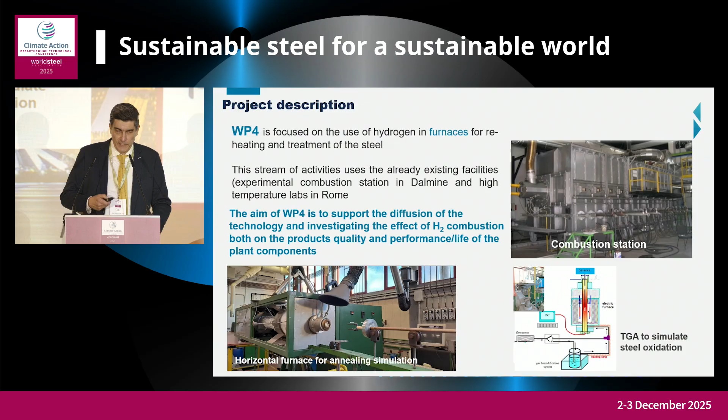Various purposes for carburization of the bath, foaming, and so on. Finally, the fourth work package did not require new facilities because we already have a combustion station in the north of Italy where we can test burners up to 3 megawatts of power. We also have lab furnaces to simulate the hydrogen combustion atmosphere and test its impact on different steel grades as a function of time and temperature, and also perform scaling and pickling tests to evaluate the impact on the capability of scale removal.

Just a very quick geographical note. We are in Italy, located in Rome, and these are our working sites. You can see the labs are almost completed, and the DRP plant is also almost installed. Yesterday we had an official visit from representatives of the Italian government.

The electrical furnace is installed, and the first heat with our electrical furnace is foreseen within December. We are trying to run as much as possible, so I don't know if it will be just before or just after Christmas, but we will switch on the furnace. We are also erecting our training center, because dissemination and training activities are an important part of this project.

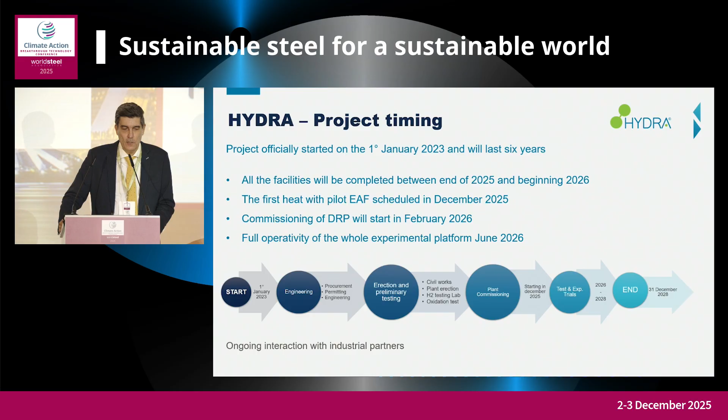The project started two years ago, and now we are in the middle of it. We are completing the erection of the plant and labs, and we expect full operativity of our platform after commissioning and training of technicians, which I think will be in spring of 2026. In the meanwhile, we started some preliminary activities.

We performed, for example, a very interesting activity about the kinetics of reduction of low and high quality grade pellets, and we saw a different impact of some controlling parameters. Here you can see the kinetic curves where we reported the mass loss. We may also report the metallization degree, and we have those curves too, but with mass loss, the different behavior of the two grades is, I think, more impressive.

In the case of high grade, we recognize that the kinetics are enhanced, and there is less dispersion of data with respect to the variability of process parameters.

We performed a lot of tests to determine the impact of water at different temperatures on the oxidation rate, from 900 degrees up to 1200 degrees, with different steel grades. We are also just starting an activity to study the compatibility and limits of existing combustion systems working with blends of hydrogen and natural gas.

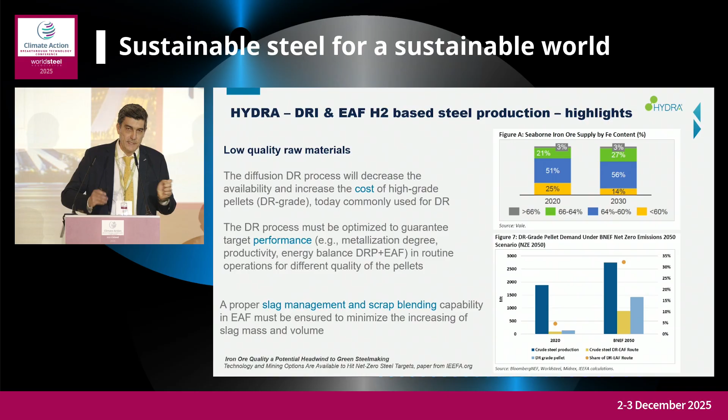Another aspect is blending with scrap — that's another factor we can modify in order to accept lower-grade materials. And another aspect is hydrogen availability.

Another important issue is the carburization of DRI. If you produce with hydrogen, you don't have, for sure, carbon in your direct reduced iron. Is this a good or negative fact? There are a lot of analyses about this aspect. Personally, I'm not so sure that a DRI totally carbon-free is the best option for the melting step. So the way we address carburization of DRI is an important matter. Basically, we can provide carbon to the process in different manners: as solid carbon in the mix of pellets, or injected into the electrical furnace, or as gaseous carbon blended with hydrogen or injected in the lower part of the furnace. So which is the best optimization practice, or the best option?

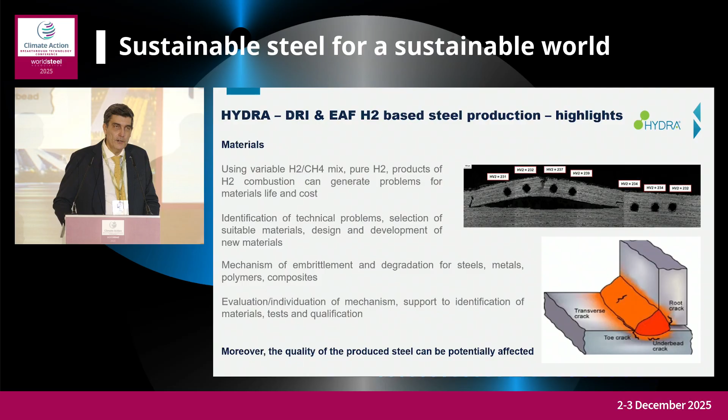And then at the end, there's the impact on materials. The impact of hydrogen on materials, not only steels, but also in general metals, polymers and composite materials, is a well-known issue in the scientific world. But now we are putting materials in more severe conditions, so more studies are necessary, and this is why we believe facilities without advanced labs are not complete. This is the reason we decided to invest strongly also in basic studies of materials interaction.

Here you can see the border of our project and the border of important surrounding processes, such as hydrogen production. Here I put a drawing simulating an electrolyzer, but hydrogen can be produced with different technologies, so the analysis of different production technologies is also an issue. The interaction with the renewable energy grid is an important issue for sure, and there are some important aspects not explicitly included in our project, but on which we are already starting to work. That is the development of innovative monitoring and control systems. For example, we are making some hypotheses of working with innovative systems for gas analysis, or for monitoring the gaseous atmosphere inside the DRI reactor.

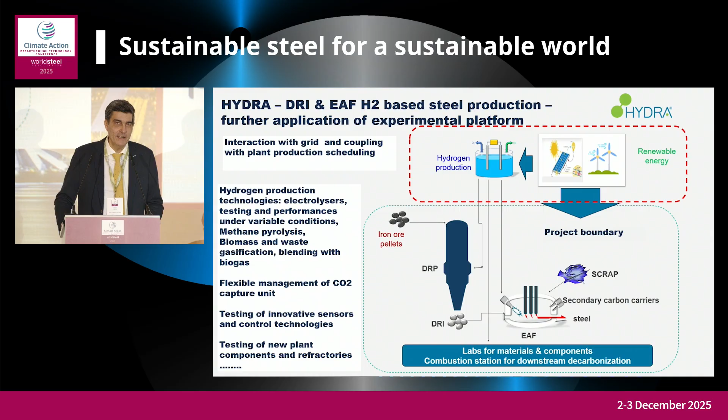I mentioned refractory. We have a hypothesis: we are thinking of putting some bricks of innovative refractories in the electrical furnace to perform experimental campaigns and take samples to check what happens. I'm explaining it in a simple way, but the experimental activity is actually a bit more complex.

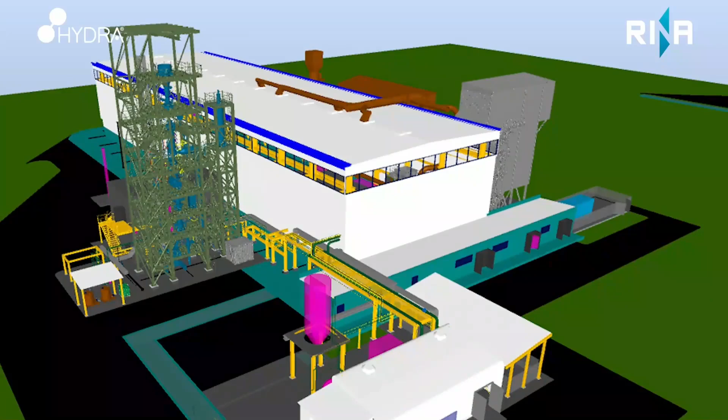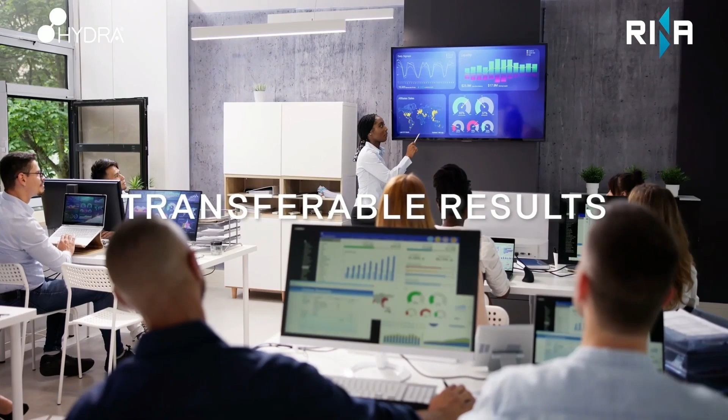Steel is essential to our daily lives, but its production is one of the main sources of CO2 emissions. For every ton of steel produced, nearly two tons of CO2 are released into the atmosphere. The challenge is to decarbonize steel without losing market competitiveness. HYDRA ET06, promoted by RINA and funded under the IPCEI Hy2Use initiative, with support from the European Commission and the Italian Ministry of Enterprises and Made in Italy, proves that it is possible to produce green steel using hybrid hydrogen-methane systems and other reducing gases. In Castel Romano, near Rome, we are building a pilot steel plant where we test new technologies: a hydrogen-ready direct reduction reactor, an electric furnace that produces steel using the pre-reduced material from the reactor, and advanced laboratories to test materials and components in hydrogen-rich atmospheres. HYDRA is not just technology, it's a true innovation ecosystem where training, research, and collaboration between industry and young talents come together to spread expertise and strengthen future collaborations. HYDRA results will be transferable to all industrial sectors worldwide, yielding breakthrough productive processes while contributing to a greener, more sustainable future. HYDRA is the concrete demonstration that steel decarbonization with hydrogen is possible.